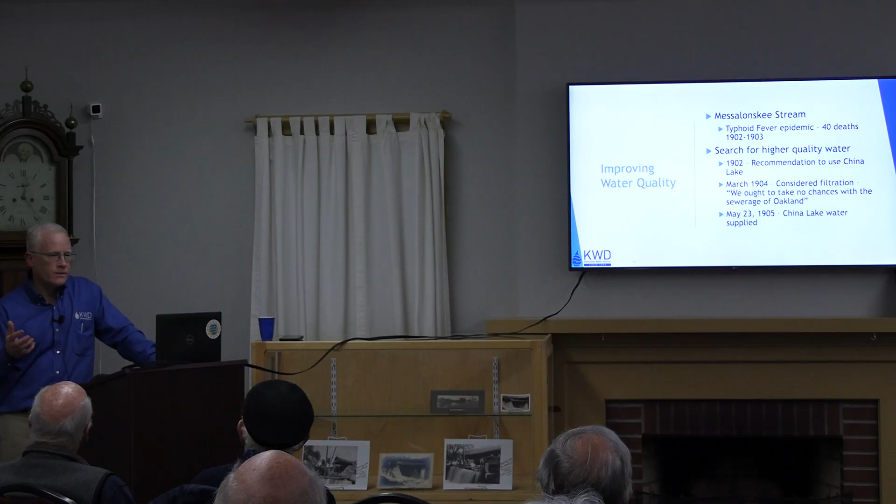That contractor ended up failing and not able to complete the project, and the district then hired another contractor to finish the work starting in January, and went after the surety bond of the contractor. They were bonded, and as far as I know, they got the funds back from the surety bond. So the district still only ended up paying out $76,000 for construction work, because the second contract was paid by the surety bond. So it took a little longer, but they did a lot of work in the winter too, which is, again, unbelievable considering it was done by hand.

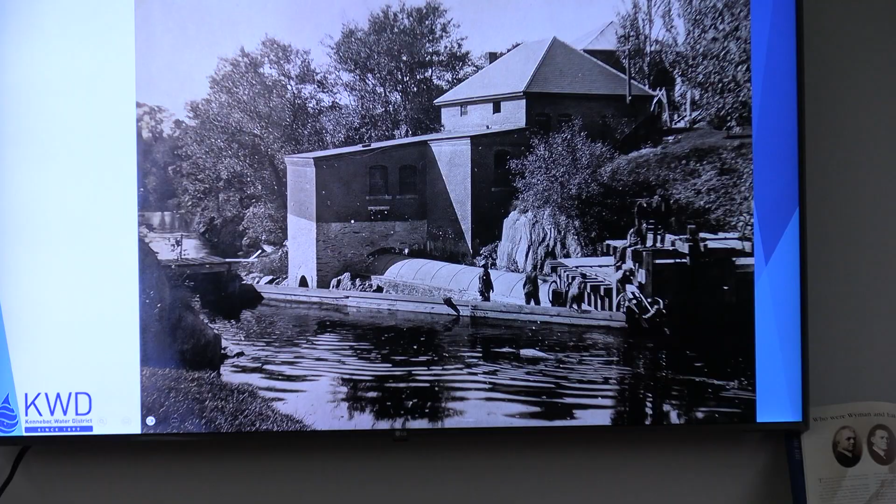And so for our pumping, we had a water-powered pump system that was upgraded in 1905. And so there was a penstock. It might be a little hard to see there, but the water was pumped using water to turn the pump. So the water from China Lake came down, and then we had water from the Messalonskee Stream turning a turbine that moved water up to the storage tank. And so we continued to use the Messalonskee Stream, but for a different purpose this time, not for water itself, but for the power that it was able to generate.

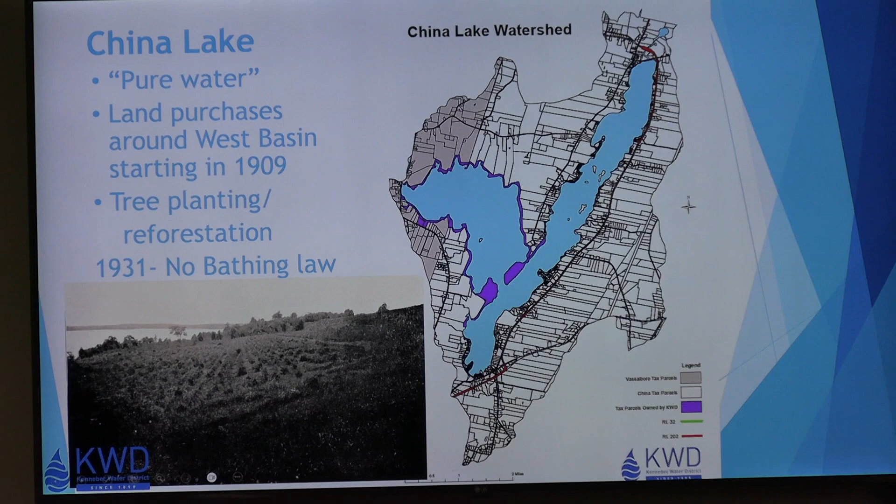1908, the Lewiston-Augusta-Waterville Street Railway opened a trolley service from Winslow to East Vassalboro. So that started on June 27th, 1908, and increased access to the lake. More people could get out to the lake and enjoy the beautiful lake. And just like today, we love recreation. People love houses and camps near the lake. Same thing. And the trolley just made it accessible, you know.

And all of a sudden, for the trustees, the sewage idea started flashing because there were no septic systems. You know, so you build a camp, you build a house, whatever, and it was maybe a cesspool, maybe a straight pipe to the lake. People don't want sewage in their camp or their home, so outhouses, cesspools, straight pipes. There's sewage involved with human activity, and the trustees became concerned. And so, in 1909, the trustees said, we need to do something about it. We need to protect this source of supply.

So they bought up most of the shoreline properties, about a 200-foot buffer, all the way around the west basin of the lake. So that west basin is like the thumb of the lake here on the left side, and what you can see there in purple is land that the Kennebec Water District owns, and most of that was bought between 1909 and 1920 something, as we spent some time buying up that land.

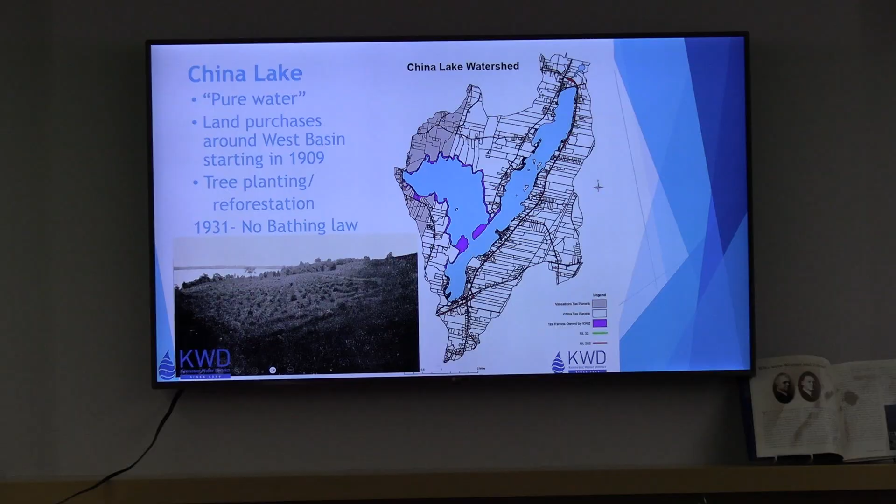And then, as you can see here on the lower left, a lot of the land around the lake, especially on the narrows in between the two basins, had a lot of agricultural activity, and there were very few trees out there. And so we planted thousands of trees on the narrows there to restore the forest. And that's the practice today.

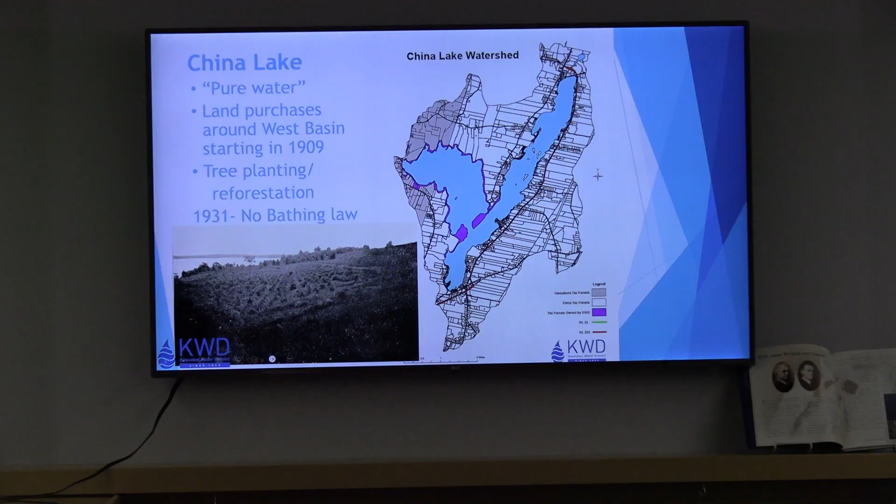One of the best products you get out of a well-managed forest is clean water, I guess I should say. A well-managed forest, one of the benefits of that is clean water. And whether they intuitively thought of that then, I don't know, but planting trees was a great decision to reduce runoff into the lake, and a natural forest will preserve water quality.

And then in 1931, the Water District worked with the legislature to pass a law for no bathing. And we say that's no swimming. Some people argue, well, I'm not going to go take a bath in the lake. Well, in the vernacular then, spending time in the lake swimming was often referred to as bathing. You put on your bathing suit to go into the lake. And so the legislature passed a law that said, we want to protect the water quality.

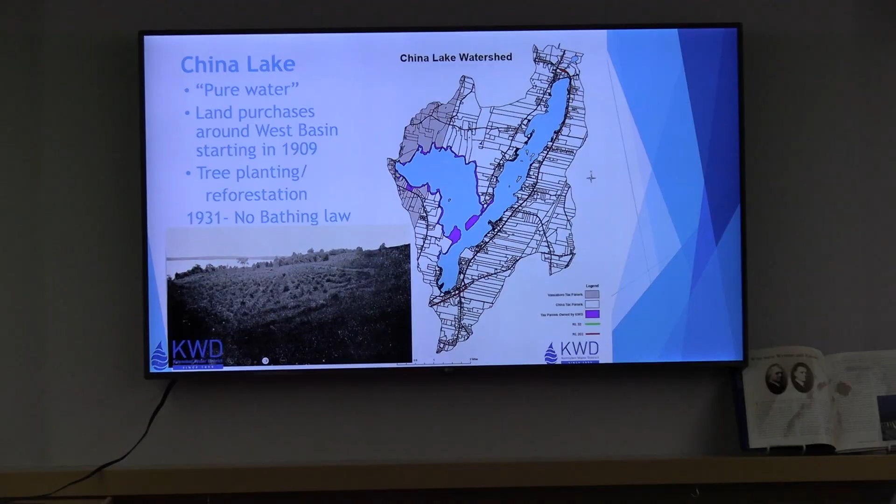And one thing that's really important: the best source of supply for a public water system is one where there's no human activity in the watershed. That would be ideal. Now, you're almost never going to find that ideal, because there's competing demands on that resource. But human activity equals degradation of water quality in almost all cases. And so reducing human activity in the lake, and particularly having people's bodies in the water, reduces the risk of disease entering the water body, which protects public health.

In 1924, we built a new electric pump station. This is the Western Avenue pump station. That building is still there, and it's still functioning for us. There's different pumps in there now, but this was a great advancement.

So in 1924, there were I think 3 dams on the Messalonskee Stream right there in that small area. The Kennebec Water District, CMP, and I'm not sure who the other entity was, got together and one dam was created there, and we became the owner of that dam, and that generated power for us to pump water.

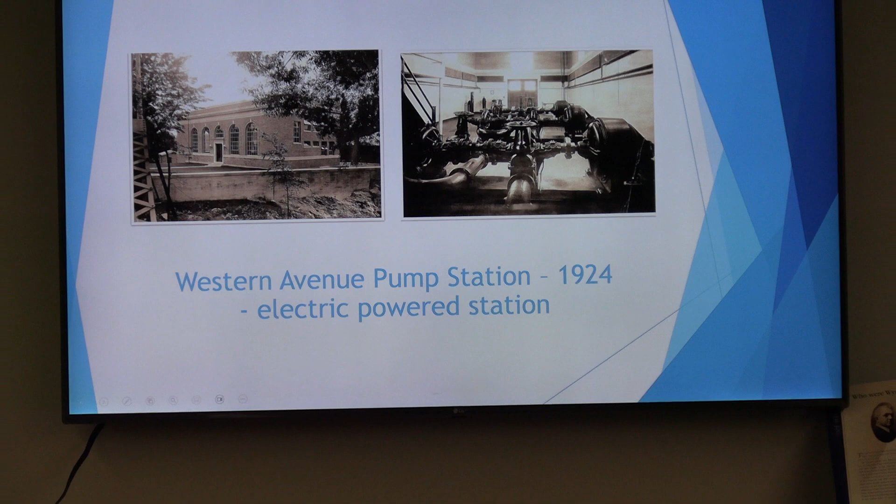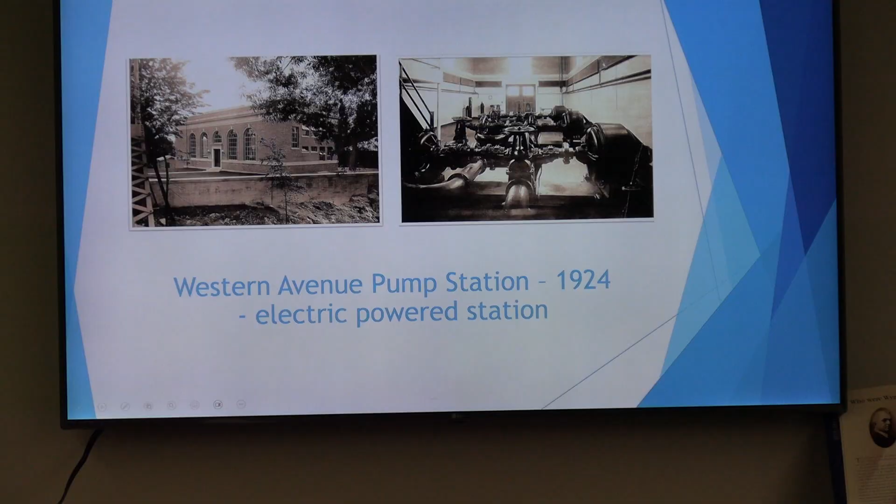We just sold that dam back in 2019 because it needed a lot of investment, and we weren't in the hydroelectric business, so the trustees made a decision to separate ways with that, and Messalonskee Stream Hydro owns that dam along with the 3 other dams on the Messalonskee Stream. But we spent a long time working with that. CMP did take ownership of it, and then we got it back when CMP had to divest themselves of all power generation in the 1990s.

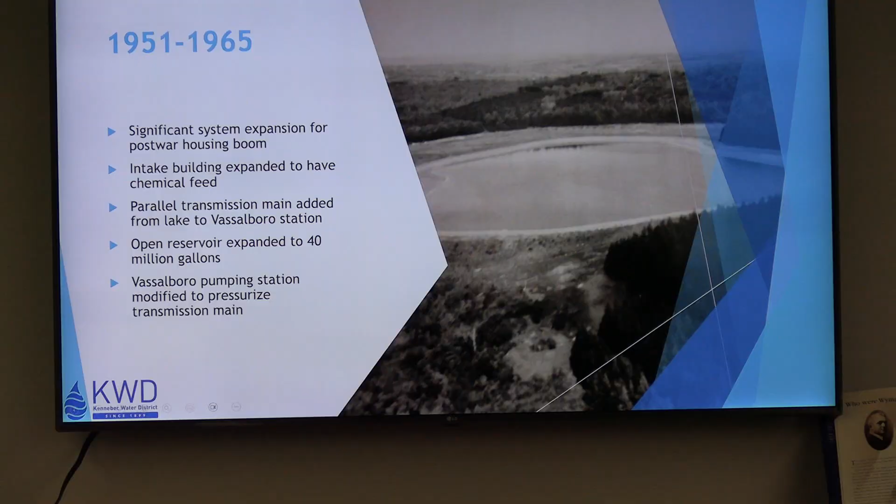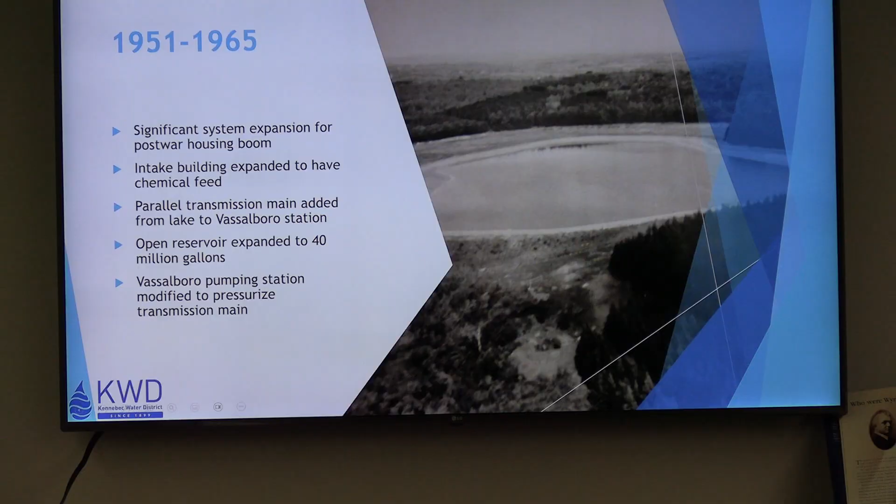All right. So, jumping ahead a little bit, from 51 to 65, lots of expansion of the water system, post-war housing boom, and we added that small intake building out at the lake. We put a new building out there, and we started adding chlorine to the water. So that was the first time, in the early 50s, that we actually added any chemical. In 1965, we started adding fluoride to the water as well.

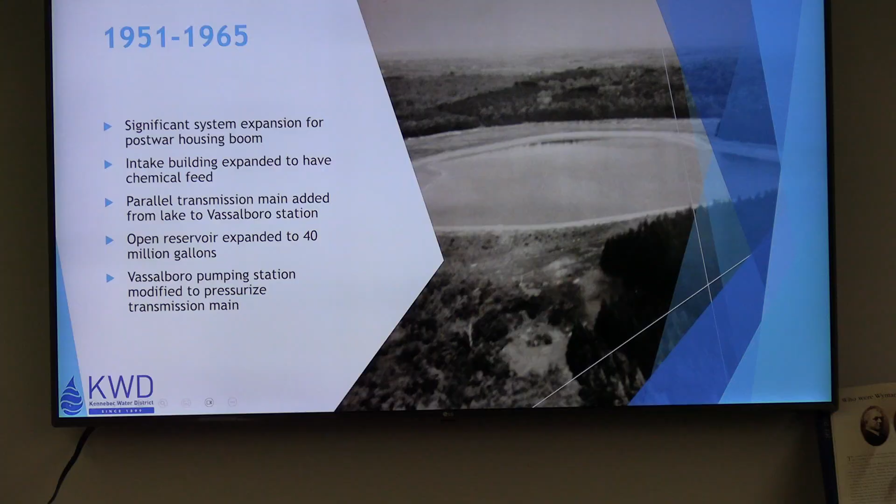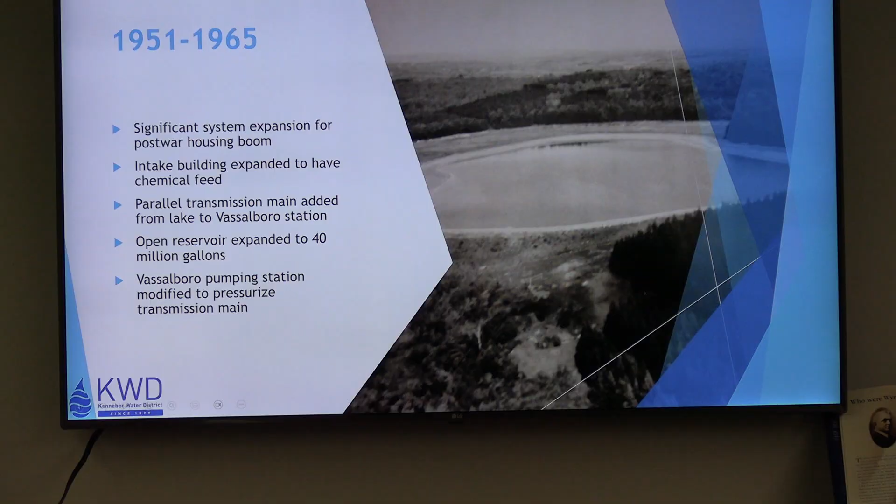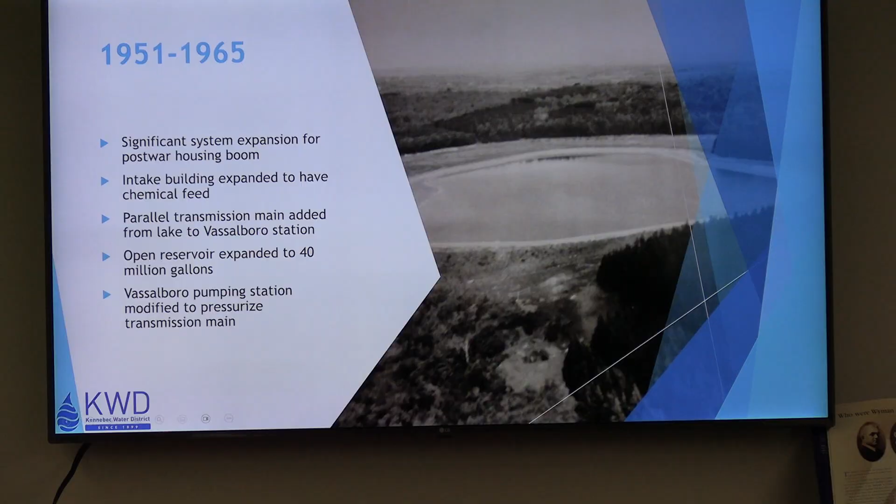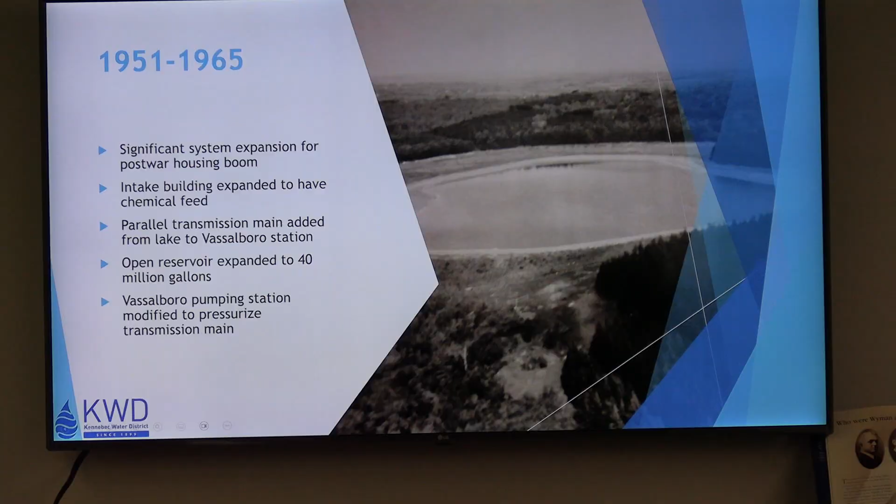We put a parallel transmission main from the lake to North Vassalboro, and put a pump station there so that we could create a distribution system off that pump station. The water pressure in the transmission main in Vassalboro is very low because it's just flowing by gravity. So we put this pump station in and added some distribution pipe in Vassalboro so we could serve the residents there, because before that, we weren't serving anyone in Vassalboro. The pump station boosts the pressure up so it could be distributed in the North Vassalboro area.

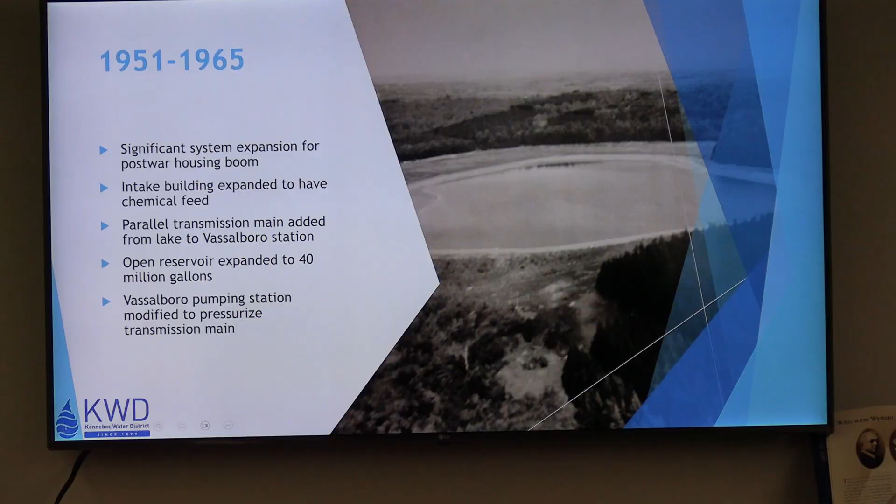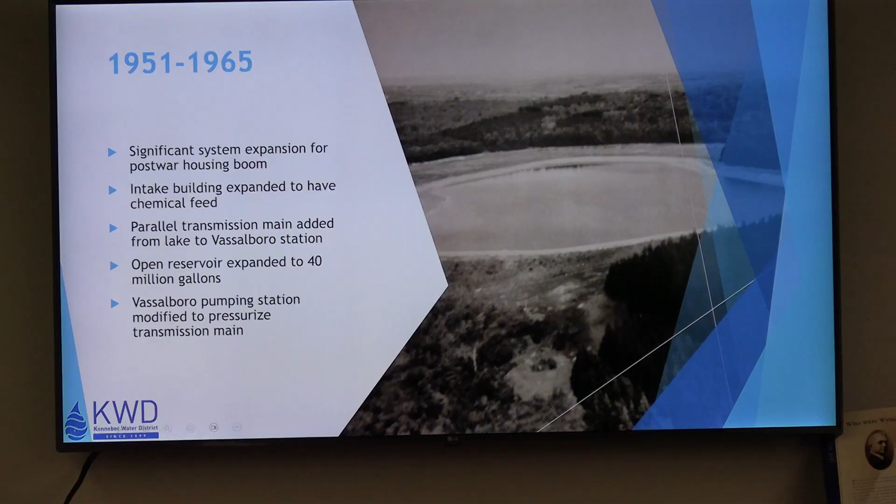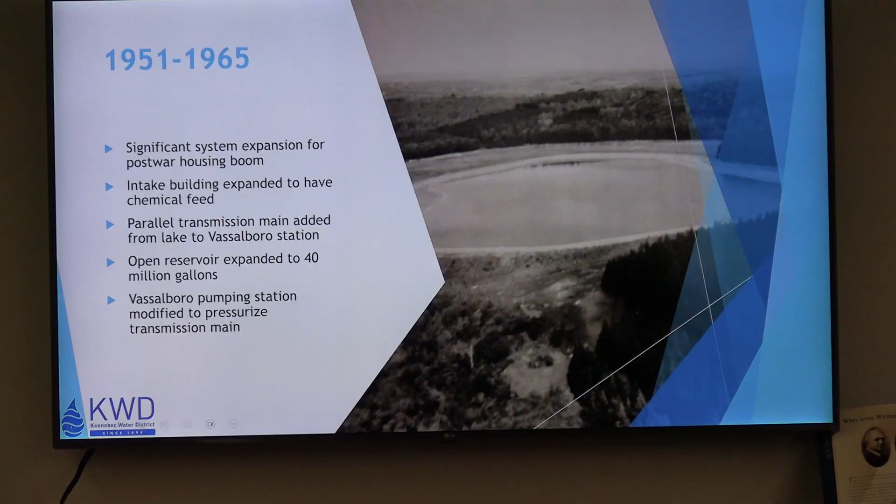We took our reservoir that was up on the hill and made it a 40 million gallon reservoir. And something I didn't mention before was that this 40 million gallon reservoir, as well as the other one, was just open to the atmosphere for the ducks to land in, the geese to land in, and whatever. There was less concern; we were just pulling it from the lake anyway, originally, so what does it matter if it's open to the atmosphere? That changed in the early 90s, but 40 million gallons of storage is a lot of storage. That's an enormous finished water storage tank or reservoir.

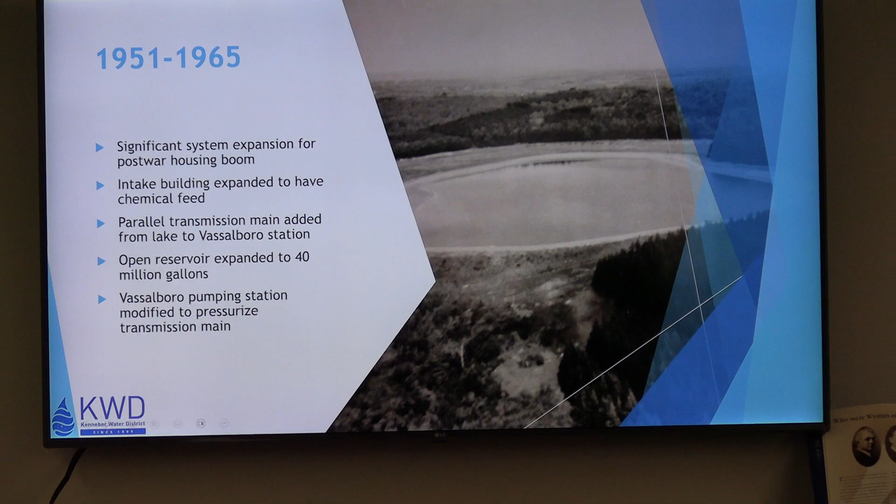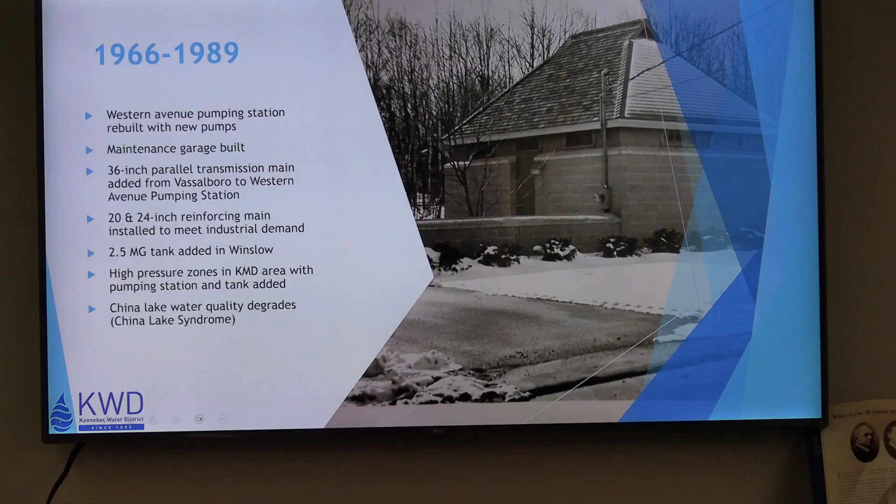And then from 66 to 89, a number of improvements were made. We put in some new pumps, some updated electric pumps into the Western Avenue pump station. We built a maintenance garage there on South Street. We put a transmission main from the parallel transmission main we had from the lake to North Vassalboro. We continued that all the way into Western Avenue in 1970. And we did some expansion of the water distribution system again. We added a storage tank on Taylor Road in Winslow, which we don't actually use anymore because we have so much storage in Waterville.

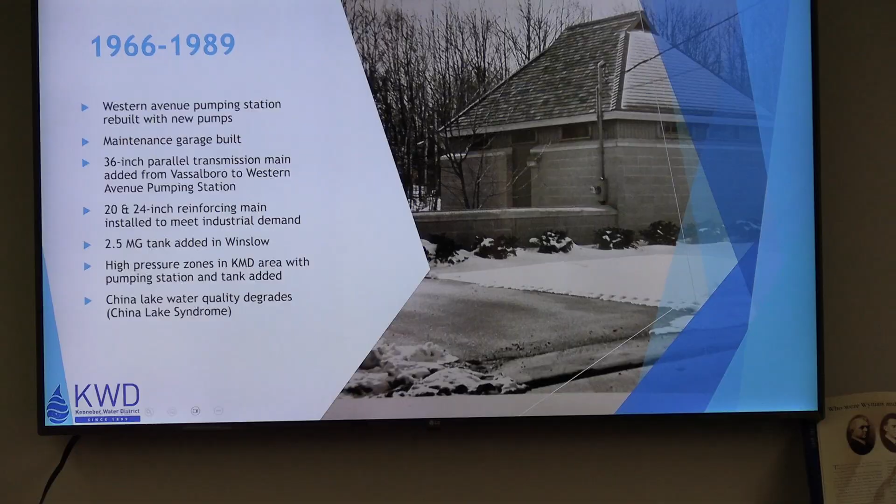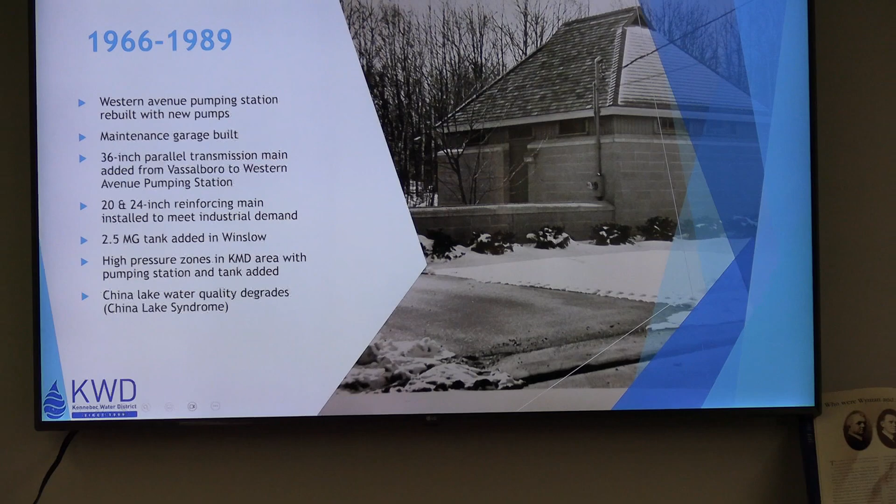And then we created the high pressure zone that really went from Inland Hospital up KMD to Oakland. We put a tank in on Chase Avenue. We have a pump station there, and so we increased the pressure there, so that would better serve that area of the community.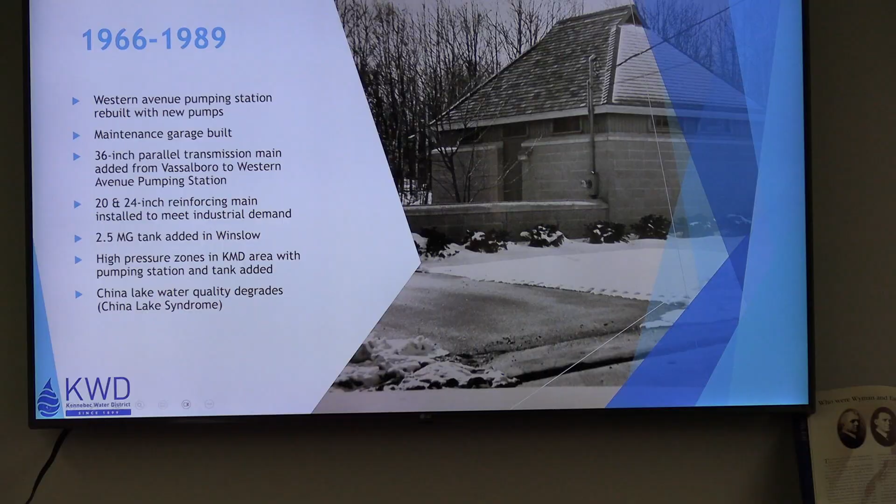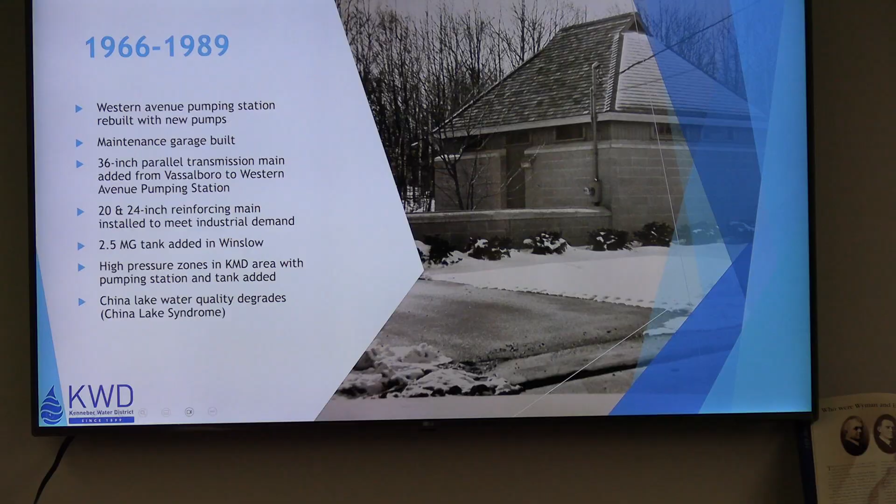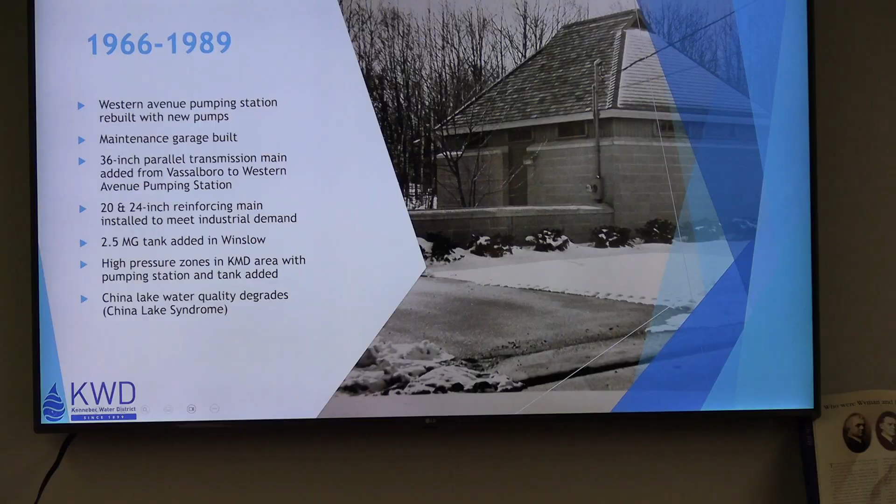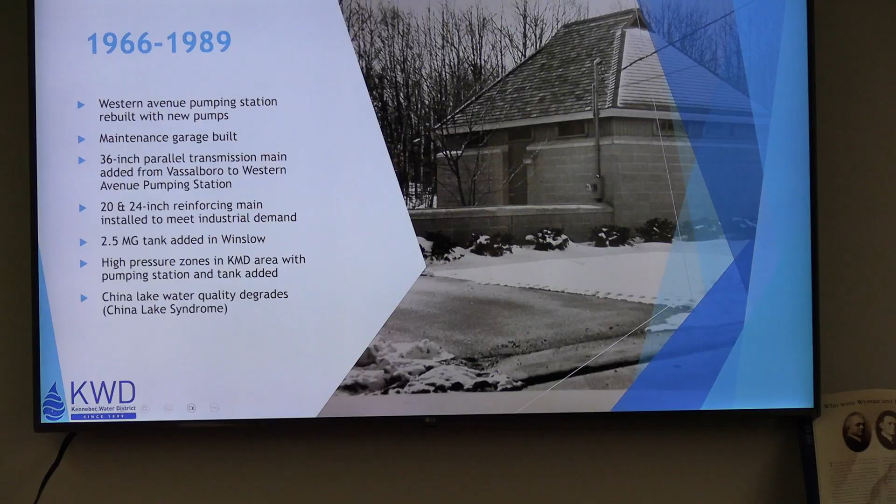But in the late 1970s, the water quality in China Lake went downhill. It's really around 1980. We had a lot of algae blooms. The water quality was really poor, and China Lake became famous and was known nationally from the term China Lake syndrome. You had this pristine lake that suddenly just switched to a eutrophic lake with lots of algae blooms, and that became a topic of environmental conversations across the country because it changed so quickly. And we were still serving that water. We added chlorine, but we subsequently had, especially in the summertime when there was algae growth, a lot of taste and odor complaints. The water didn't smell very good, it didn't taste very good, and people were frustrated.

So the trustees started looking at treatment in the late 80s to deal with that. The original Safe Drinking Water Act was 1974. Congress amended that in 86. That said if you're pulling water from a surface water, you've got to filter that water. Now there are some subtle exemptions that exist for some utilities in Maine, but everyone had to start filtering their water.

And so not only did we have these taste and odor issues that were frustrating people, there was now a federal regulation that said you're going to have to do something about the water quality, and you're going to have to cover your storage tank. And putting a cover over a 40 million gallon reservoir was not financially feasible. We built two 6 million gallon tanks up on the hill there as well. So we created a treatment process. Again, that was the first time we had to pump in the life of the water utility.

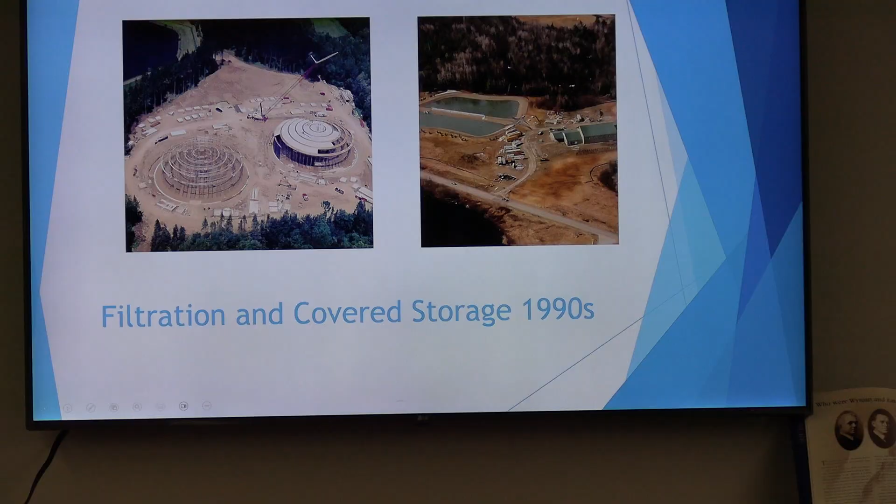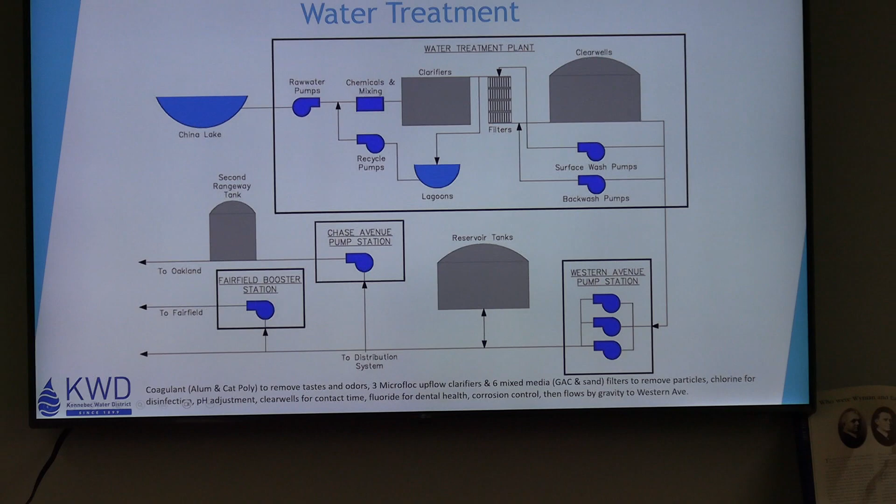In 2017, we upgraded the Western Avenue pump station. It was in dire need of an upgrade, and so we just did that. And so I'm calling that the past, because that's kind of where I step in as the general manager in 2018. So that was the past. Now, the next segment is the present, and the present is a few years wide here.

So the first thing about the present is that here's the team that's doing all the great work at the Kennebec Water District, making sure that you have a supply of water to your home and business every day. So we've got 28 employees, including myself, and we have 10 trustees now.

It's a great team. It's a privilege to lead them and help them be successful, and great things are happening.

So in 2023 we occupied our new building on Drummond Avenue. We were on Cool Street and South Street. We sold our Cool Street building. On South Street, we sold the garage. We still own the office building on South Street. But we'd been there a long time, and it was time to have a complex that could meet our needs for the future. And so we have a wonderful building that we can put all of our equipment in now, and it is a tremendous resource for us.

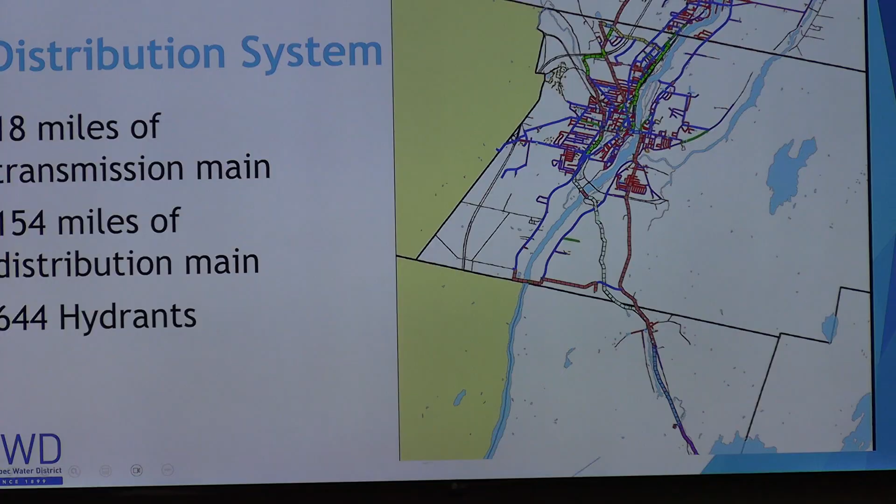So our distribution system, just to highlight, we have 18 miles of transmission main, because we had 8.5 miles each way. Actually, maybe that's 17. Maybe I should revise this slide. But parallel lines, and then 154 miles of distribution main. So it's about 172 miles. If you drove from Waterville to Houlton, that's about 172 miles. It's a lot of pipe under the ground. Most of our distribution system infrastructure is buried, and so we have to maintain that buried infrastructure. And then about 644 hydrants.

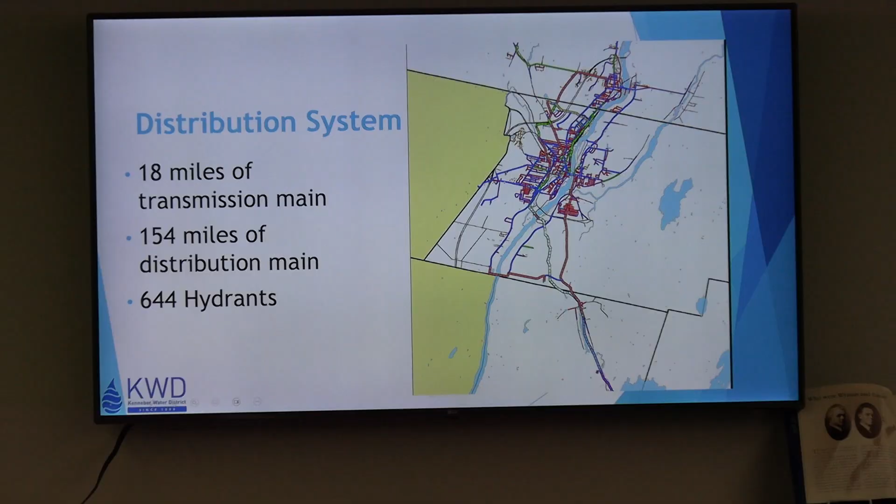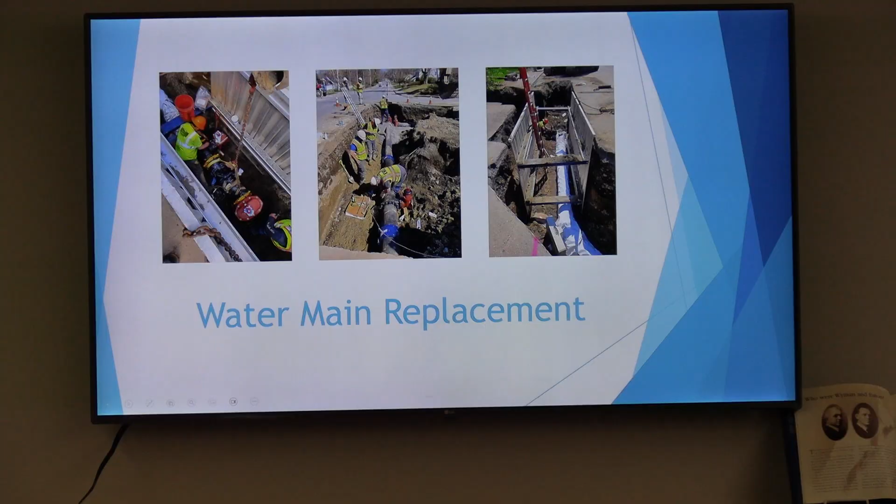And we do a lot of water main replacement. Although this is general terms, the first 100 years, everything was new going in. And now all that new stuff is old stuff, or most of it anyway. And so we're in the era now of replacing pipe, and there's a lot of pipe to replace. The needed investment there is significant.

We provide public fire protection. The photo there is of the fire department working on the fire at the Last Unicorn. They had lots of water, and they were able to save the buildings. The fire department did a tremendous job there, but it was our water they used to save the buildings adjacent to that.

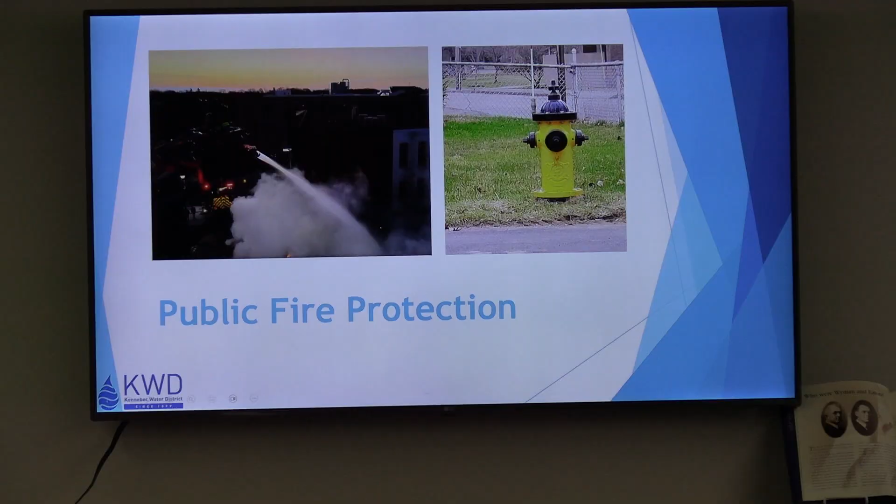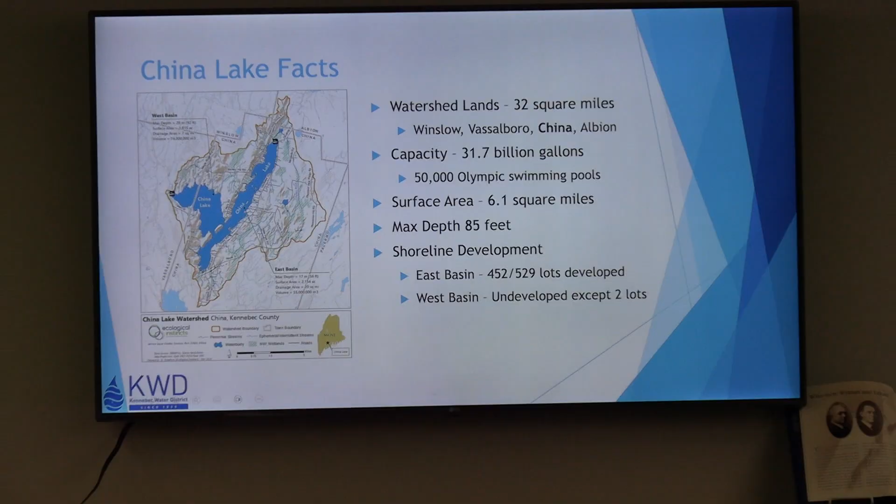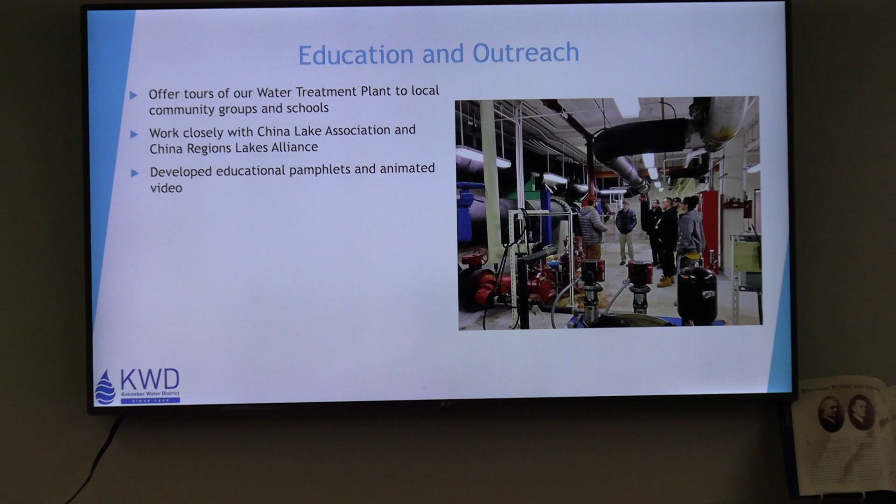And China Lake: 32 square miles of watershed, 32 billion gallons of water in that lake, and the deepest part is 85 feet. On the East Basin, 452 out of the 529 shoreline lots are developed. On the West Basin, there's only 2 lots that are not owned by us. So pretty significant legacy there. We go out and sample on the lake regularly to determine the water quality. And we do some education outreach. We offer tours of the treatment plant. We have stuff on our website.

Trying to see what's going on here.

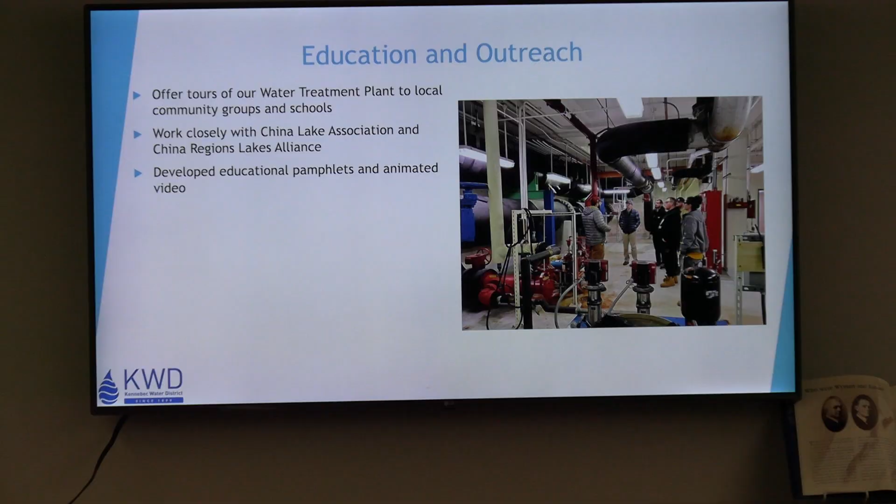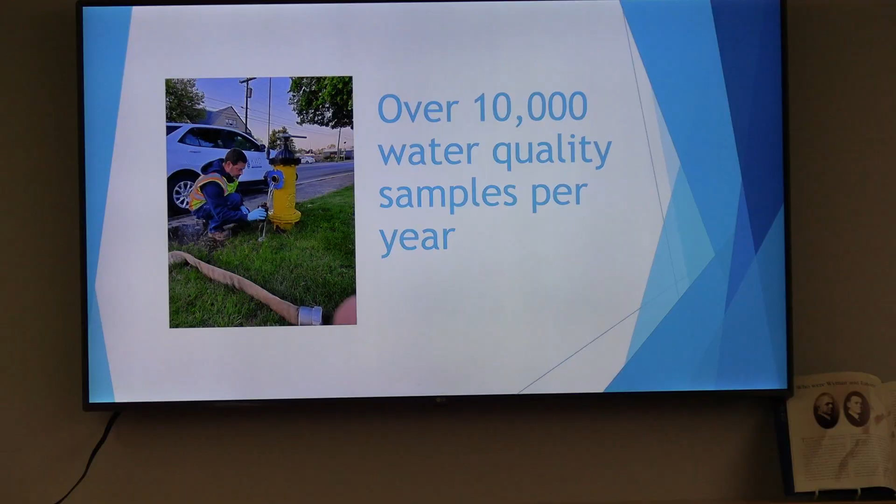For water quality sampling, we do about 10,000 samples per year to make sure the water is safe. A lot of those samples are done at our lab at our treatment plant. We're doing analyses out there all the time, and some of that gets sent to certified labs. We have a certified lab, really certified for bacteria. We send other samples out to other certified labs. But we're doing a lot to measure the water quality to make sure the water you receive in your home and business is safe to drink.

So the future. As I talk about PFAS, anyone heard of PFAS, forever chemicals? Unfortunately, there is PFAS in China Lake. If we had no human activity around China Lake, there would be no PFAS. If there's PFAS in your source of supply, it only comes from human activity because it's a human-made chemical. Human activity around China Lake has resulted in PFAS in China Lake. It's just above what is considered the safe level. 4 parts per trillion is the new regulatory standard, and we're at 3.5 to 5.5 parts per trillion in the lake.

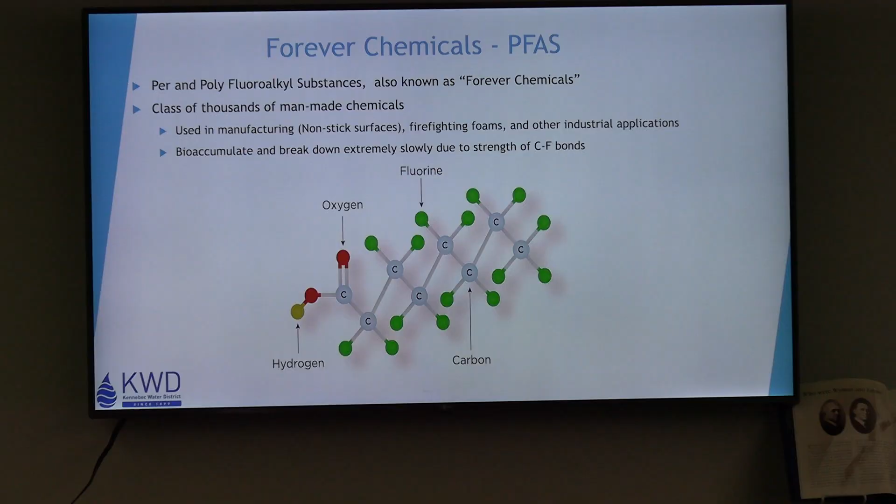And so we're doing some work to mitigate that and upgrading our treatment plant, and we've gotten $8 million in federal grants that will help aid that project. We're right in the throes of that right now. So over the next couple of years, we'll be finalizing that work.

PFAS related also, do we expand to Fairfield? Is that in our future? Yes, please. I got 1 vote. And it's a matter of funding. Who's going to pay for it? The existing ratepayers are not going to pay for that. So who else is going to invest money, and should that happen?

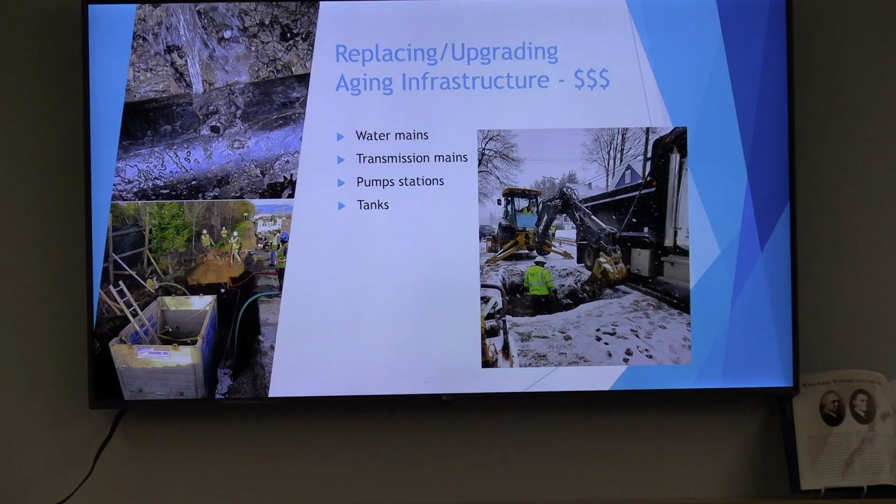Continuing to replace aging infrastructure. We've got a lot of infrastructure that needs to be replaced, and it's really expensive. On the Summer Street project this year, we did about 1 mile of pipe replacement, and that was about $4 million. So in-town work is $3.5 to $4 million to replace pipe per mile. And if you remember, we had 154 miles of pipe. That's a lot of pipe. That's a lot of money. And so there's a need for investment, and that translates to water rates, unfortunately.

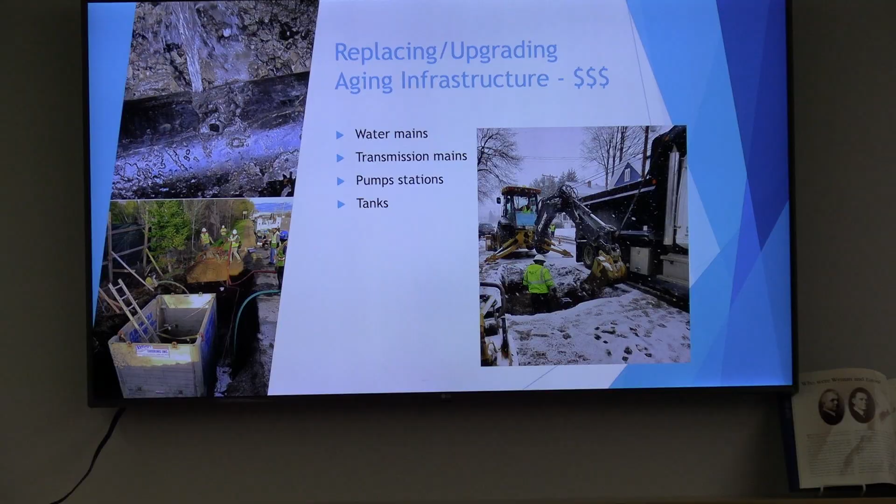But that's reality, is that if you need to replace things, someone has to pay for it. So that goes to the next question: what is the value of safe and reliable drinking water? And for us, it's priceless. And ours isn't priceless. We don't charge unlimited.

But anyway, so that's my presentation, and I'm happy to answer questions. We've got a great team that's doing great work trying to supply safe drinking water every day to you. And it's a trust that we know is sacred, because my wife is here with me tonight, and we live in Winslow. We drink the water. Our kids drink the water. Our grandson, who's living with us now, is drinking the water. Our children all grew up drinking the water. It's important. It's really important, and we try to take that really seriously every day. So thank you.

Tom. In the 90s, when you built that 36-inch parallel transmission line from North Castlegar Road to Western Avenue, did you have to go under the riverbed, or is that part of the bridge construction? How did you get the pipe across? That's a good question. I don't know the answer to that, actually. It is parallel to the existing transmission main, and I don't know if we buried that. I assume we did, but I don't know that definitively. So, good question.

We have been in a period of severe drought. Yes. For a while. And I just wonder if, looking ahead, the expectation is it will reoccur and probably more intensive in the future. What challenges does that provide, if any, to our system in terms of quality and quantity? Yeah, good question.